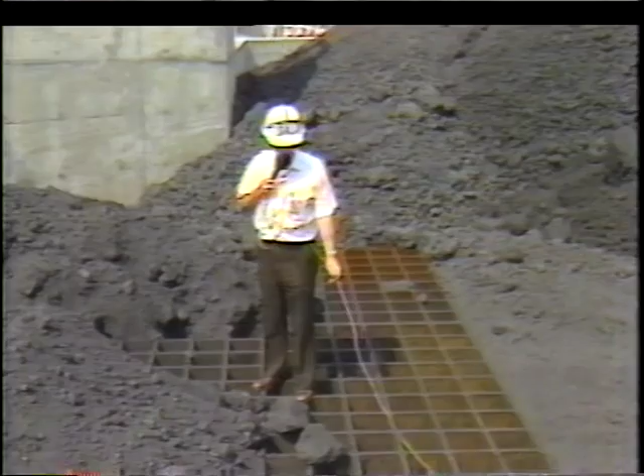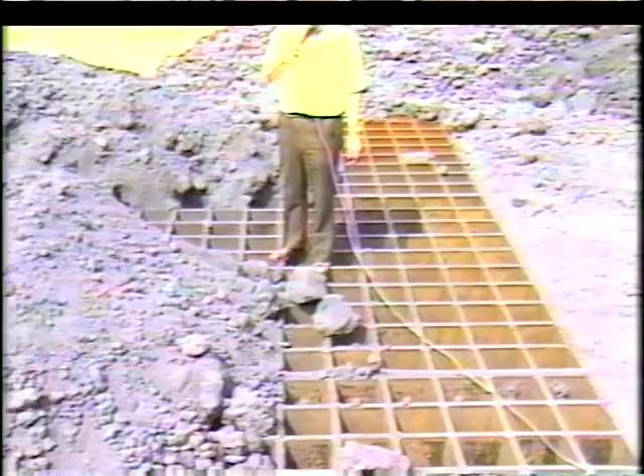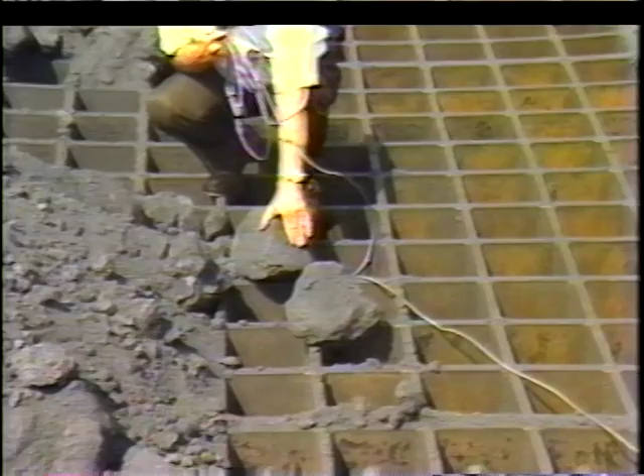We're taking a look at the beginning of our coke handling project, which is where the coke is fed from the coke yard onto a grizzly system which covers our reclaim feeder. This grizzly that we're looking at is made out of 1-inch flat bar in an egg crate configuration with 9-inch by 9-inch squares, such that none of the large lumps greater than 9-inch will pass through into the reclaim hopper, so that our feeder located below will not become plugged.

The reclaim hopper and grizzly operation will hold approximately 8 hours of inventory when heaped full. The front end loader, which has an 8-yard bucket, which represents about 5.3 tons per bucket full, dumps material onto this hopper and keeps it completely covered. The material is being fed from the coke yard grizzly.

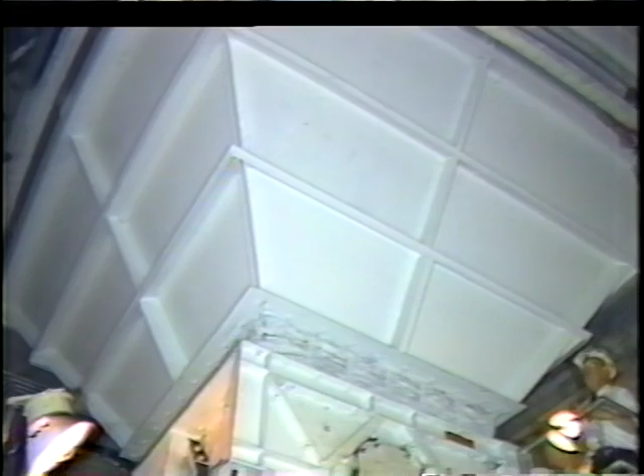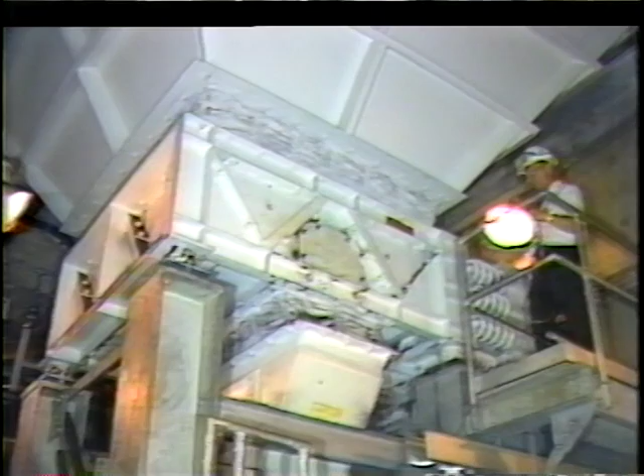It drops down into the reclaim feeder, which is what we see the excitation of by all of these springs. The reclaim feeder has an amplitude of about 5/16 to 3/8 of an inch stroke. It continues to vibrate, carrying all of the material then into the feed skirt of the coke to crusher conveyor.

This coke to crusher conveyor normally travels at around 220 feet per minute. It will deliver 108 tons per hour as currently designed. It has the capability, by speeding up the conveyor, to produce double that capacity to around 220 tons. The reclaim feeder also will handle this increased rate by increasing its amplitude proportionately.

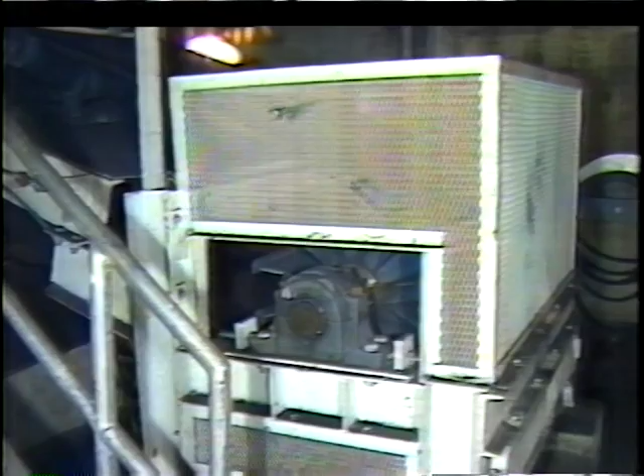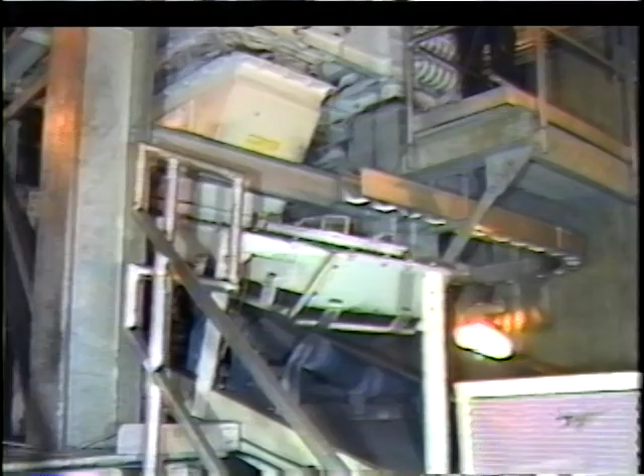Looking at the tail end of the conveyor, showing the tail pulley appropriately guarded to prevent any accidents by personnel. On the far side, which we can't see, is a zero speed switch, which tells us that the conveyor is running, or in the case of the conveyor being activated in the demand stage to run, but yet there's a broken belt or something else stopping it, the zero speed switch will detect that and sound an alarm.

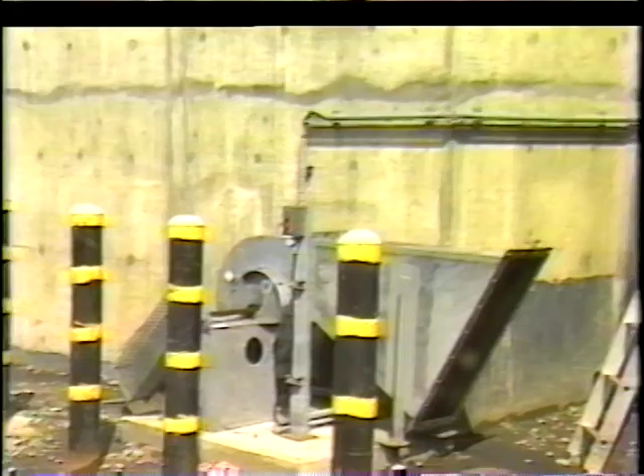Okay, what we're looking at here is the outside of the reclaim pit structure. We see in the foreground our ventilation blower, and in the background our emergency escape and/or maintenance tunnel. This maintenance tunnel is used to remove all of the machinery from the reclaim pit on an as-needed basis. We also have a ladder system whereby we can use this as an alternate means of escape if need be.

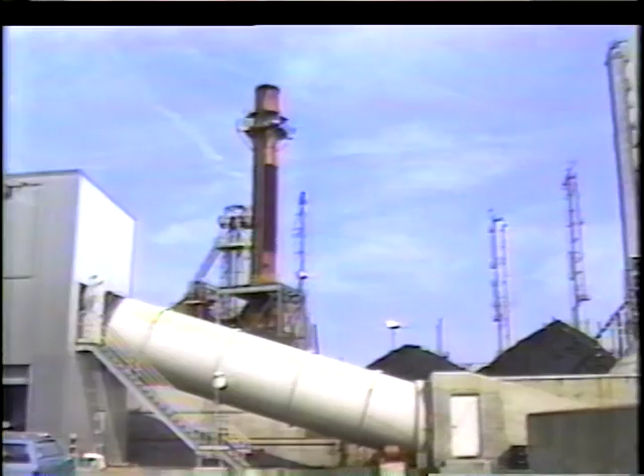Okay, we're panning on the coke to crusher conveyor system as we exit the end of the reclaim tunnel and enter into the first section of the tubular conveyor gallery. We progress up into the magnet tower, where our magnetic separator separates any large magnetic particles from the burden of coke on the belt.

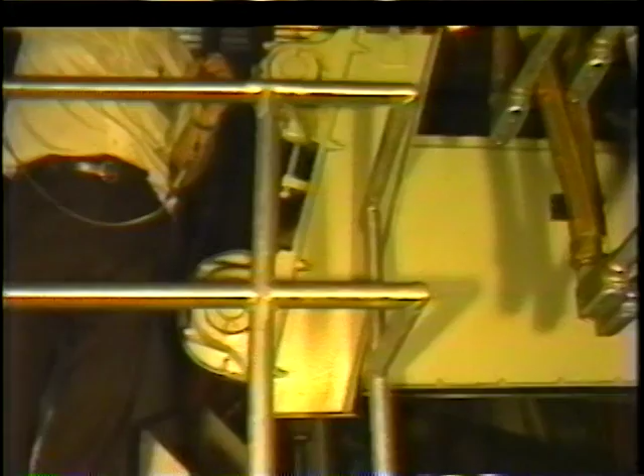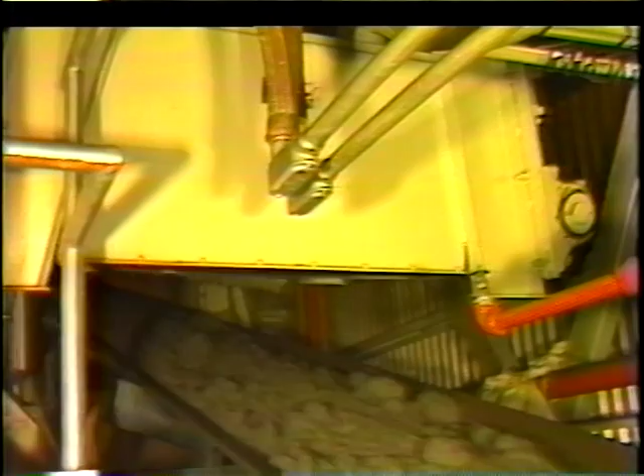This device is an electromagnet which will pick up any tramp metal that happens to be embedded in the load of coke. The electromagnet travels at around 350 feet per minute, so that any piece that it does pick up will move off of the area very quickly without getting wiped off of the belt by the surcharge of material on our conveyor.

The belt on the magnet is an endless belt. It's cleated, and will move the material off at a very rapid rate. It discharges the material after it breaks the magnetic field. It will then fall into our tramp metal chute, dropping down into a hopper located below. The belt continues up into the tubular gallery that runs to the crusher tower.

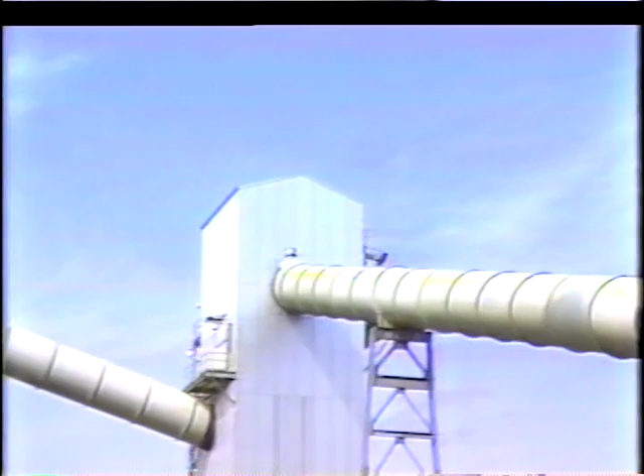The crusher tower contains a pre-crusher where the material that has been fed through the grizzly, which has a 9-inch top size, is then reduced to 3/4 by 0 size.

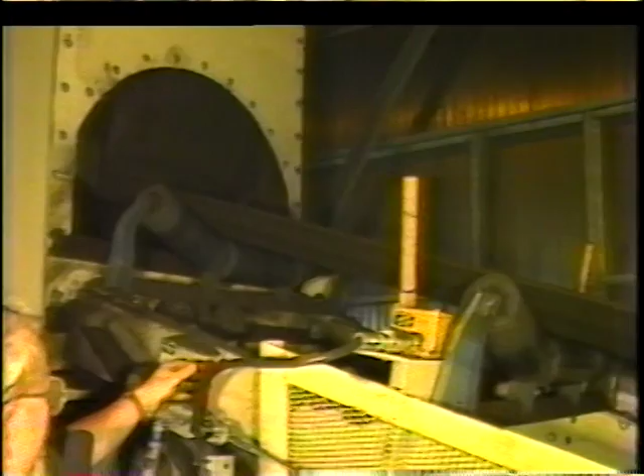Trying to focus on the emergency shutdown switches. There are a series of these located along all of our conveyors. They're all hooked up to an emergency pull cord that runs the complete length of the conveyor. So in the event that there's any problem with anyone getting caught in it, material spilling off of it or whatsoever, all we have to do is pull the cord, which disengages the switch. The red flag will then move into the horizontal position as the indicator that that is the switch that has been tripped.

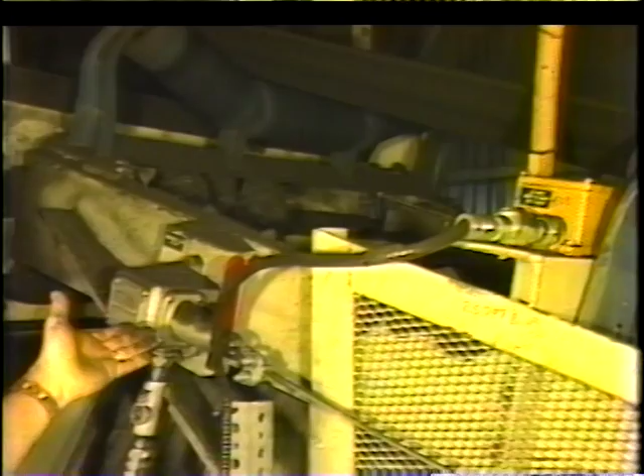Another safety device that we have on our conveyors are the belt runout switches. If our belt, for some reason or other, fails to track properly and moves from one side to the other, we have these runout switches at both the tail end and the head end of the conveyors, so that when the belt touches them, it'll trip the switch and stop the belt in that position.

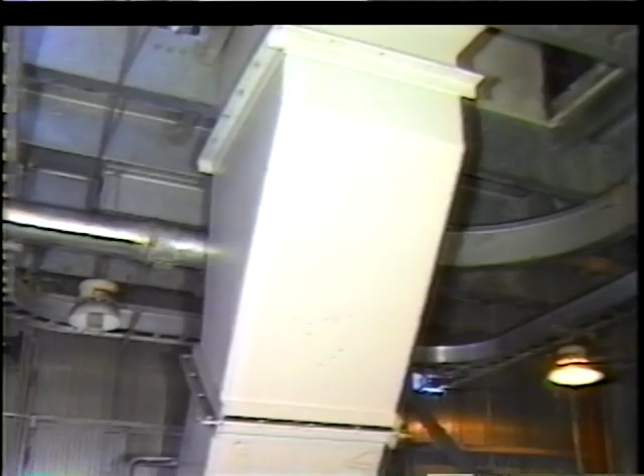What we hear here is coke going through the crusher unit. It sets up quite a racket when it's being heavily fed.

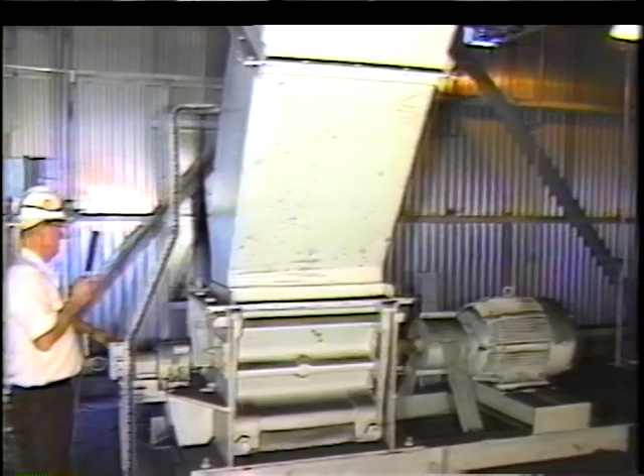We're actually feeding the mill in spurts at the moment, probably at the rate of around 150 tons per hour, which is a little bit over design, but since we're feeding intermittently, the mill can handle it.

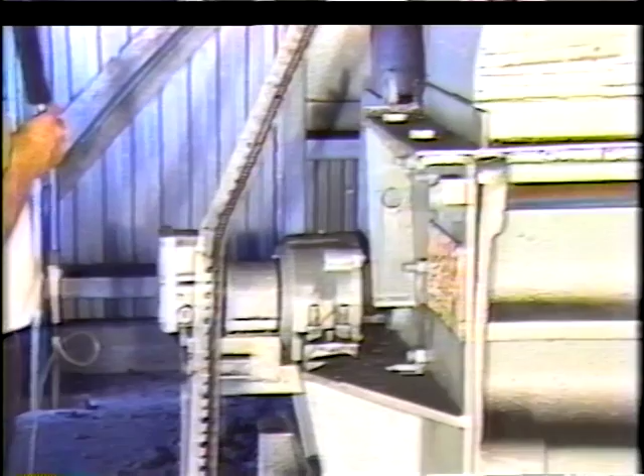We're looking at the zero speed switch on the mill, which is one of the protective devices. Anytime the motor is running and the shaft is not, it will shut the mill down.

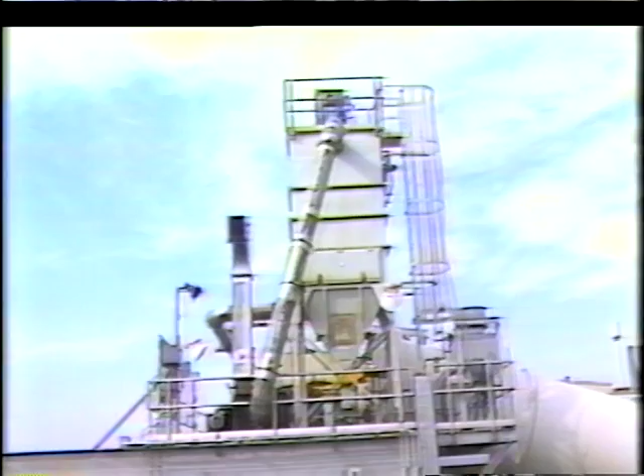We're panning again on the continuation of the coke to boiler conveyor. We see the tubular gallery extending up to the head house of that conveyor, which consists of the drive. In the foreground, we see the dust collector bag house that picks up all of the dust that's being generated in our coke transfer, cleansing it and discharging it back into our number 1 and number 2 coke conveyors, which are drag chain conveyors.

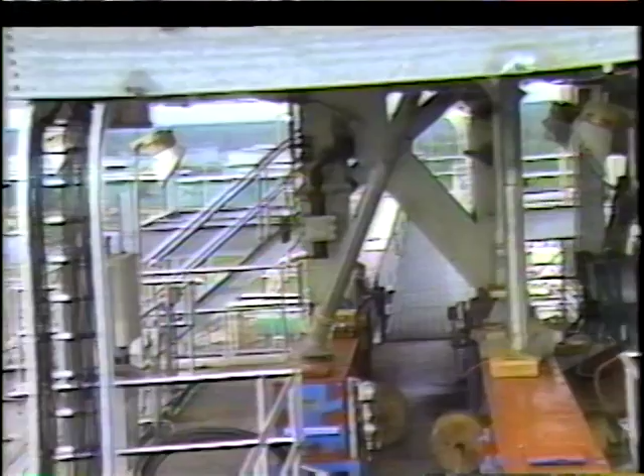Underneath the structure, we see some chute arrangements so that we can divert the coke coming up the coke to boiler conveyor either into the number 1 coke conveyor, which feeds boiler 10, or the number 2 coke conveyor, which is feeding boilers 8 and 9.

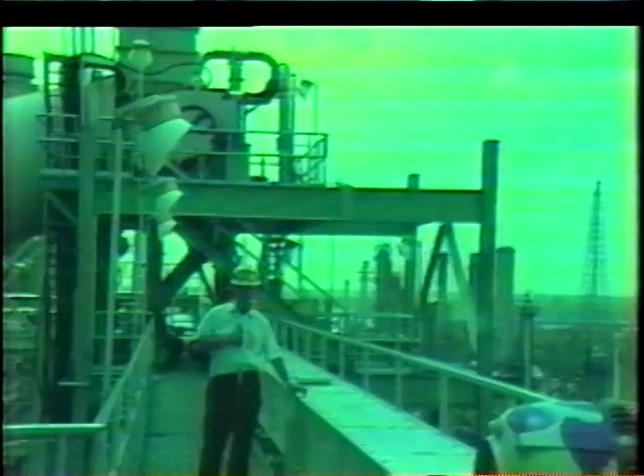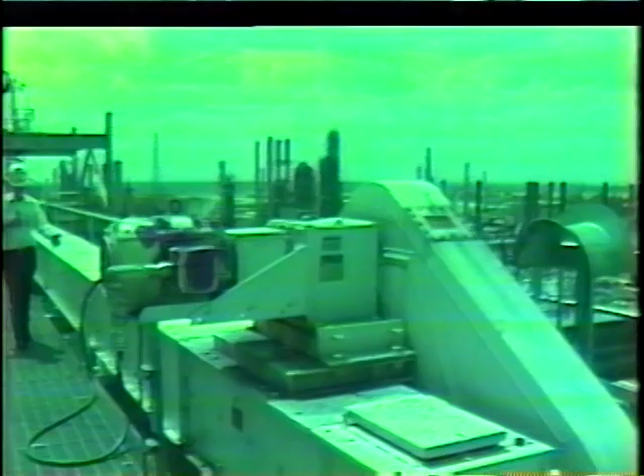I'm standing alongside of drag chain conveyor number 1 at the moment. This feeds the coke then into a chute that drops the pre-crushed coke down into our silos. The conveyor is controlled by a hand-off automatic switch driven through a 15 horsepower motor and gear reducer, driving this drag chain conveyor at a very nice, even and slow speed. You can see the rotation of the end sprocket turning at the moment.

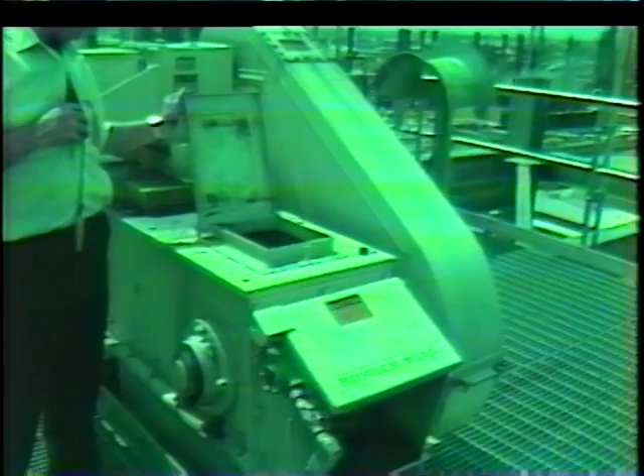We have inspection doors throughout these conveyors so that we can inspect what's going on. The conveyors are totally enclosed, so from an environmental point of view, they're ideally suited for this application in handling the fine coke.

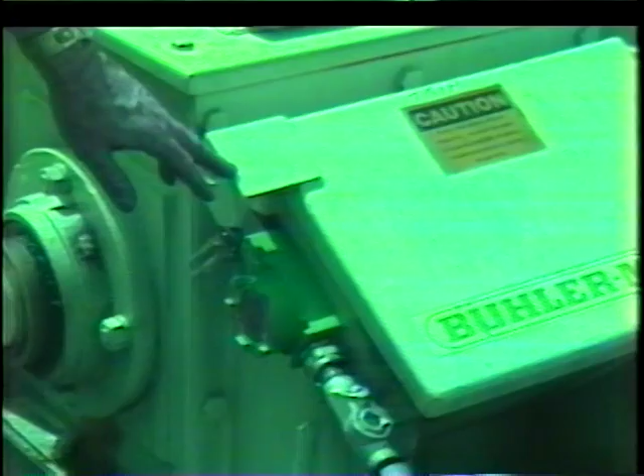The conveyors are basically positive displacement machines, such that if the chute were to plug up with coke, there would be no place for the material to go that is being dragged down here, and it would either overload the machine and trip it out, or most probably would lift up this door at the end of the conveyor, which is basically nothing more than a safety valve, so that when this door trips up, the micro switch that senses the door movement would trip the conveyor off, and that would act as our safety device.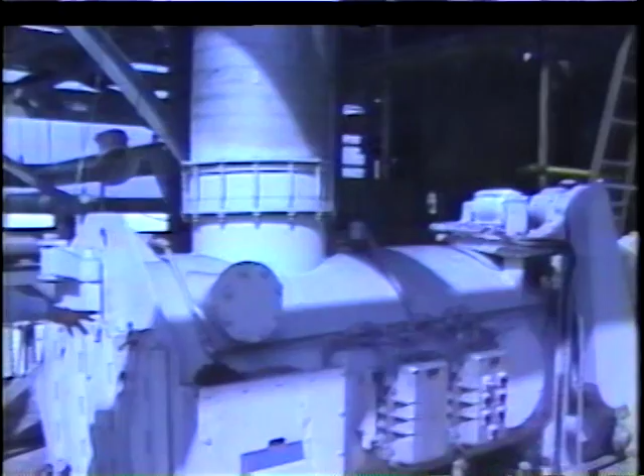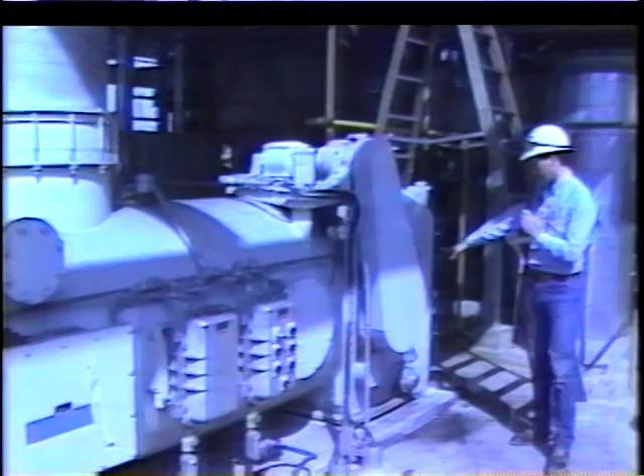Once on the belt, it is weighed. The coke drops off the end of the belt, where it free falls down into the pulverizer. There is another indicator here, which indicates when this pipe is clogged.

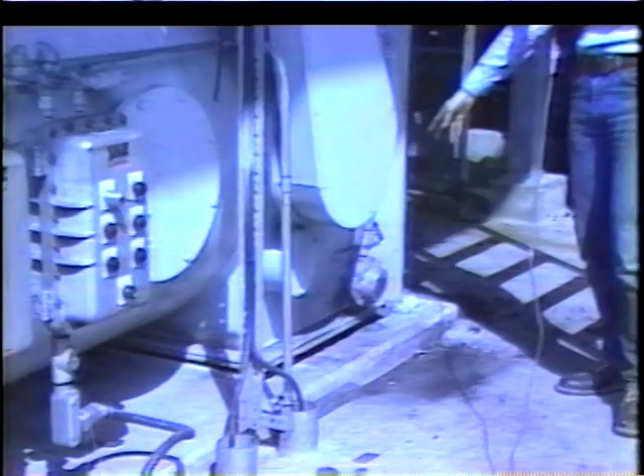Okay, this is the line where the material enters the pulverizer. It comes directly from beneath the weigh belt feeder, drops down through the stainless steel pipe, and goes directly into the bottom of the grinding chamber.

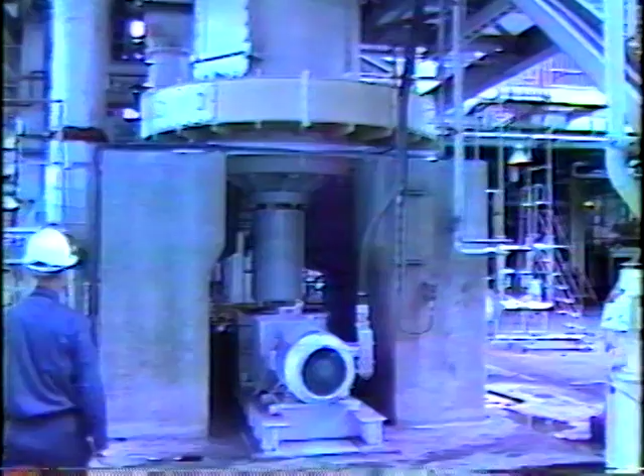At this time, we'll take a listen at the mill so we can hear it in operation. Sound of the gear reducer. And the sound of the 300 horsepower Siemens Allis motor. The mill is now at 21,500 pounds per hour, full out capacity.

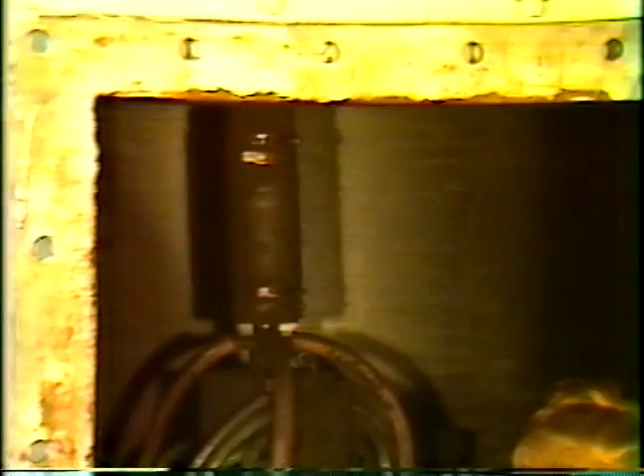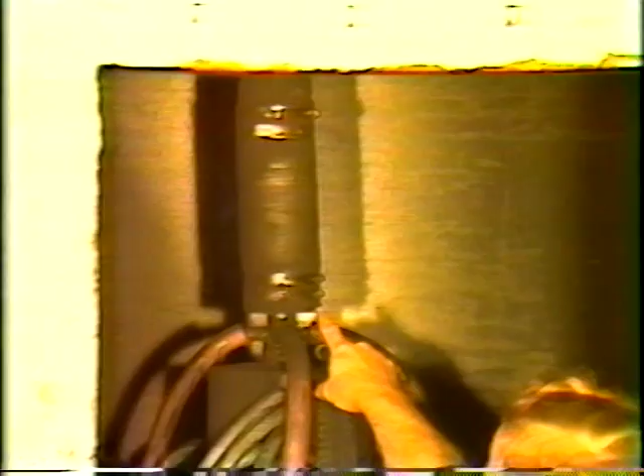Okay, this is the inside of our DF roller mill. We have an air seal, air supply coming in that supplies air to our rotary air seal. This air seal distributes air through this red flexible hose out to each journal. The purpose of this air seal is to keep an airlock on the journals to keep the dirt out.

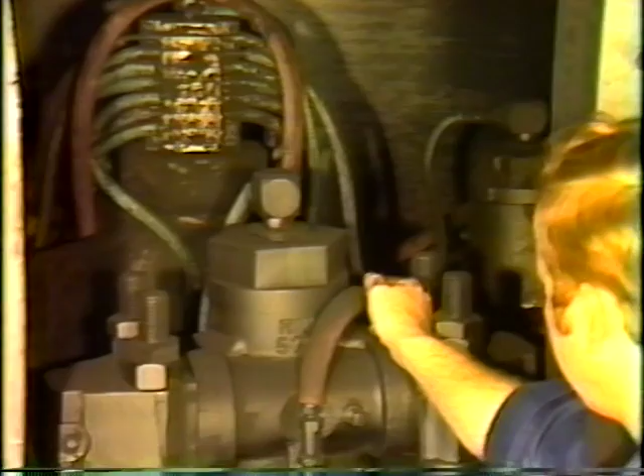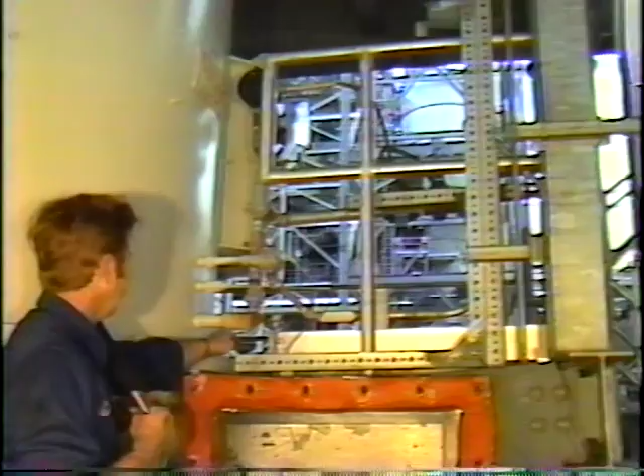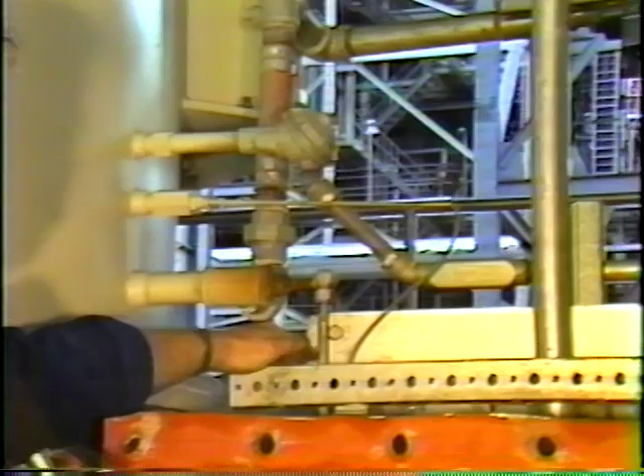Okay, the air seal, this is where the air seal line comes down into the journal. What it does, it provides air pressure into this area right here, which keeps dirt and material away from the seal. Okay, here we have the location where the air supply enters the air seal, and here we have the lubrication line which supplies lubrication to the inside of the pulverizer.

Up here we have a thermocouple which measures temperature of the inside of the mill, and here's a secondary temperature probe that Shell Oil has provided for their controls.

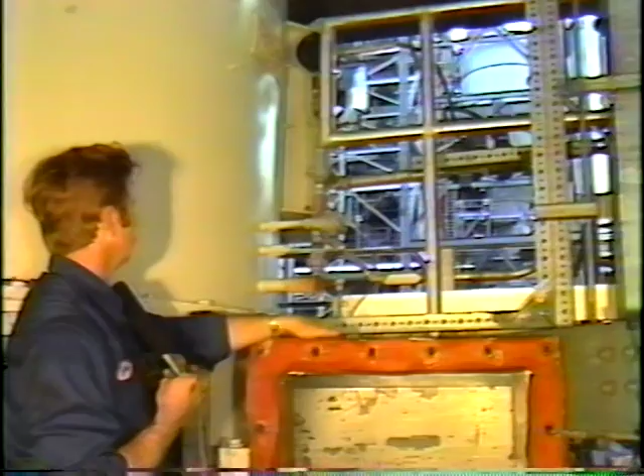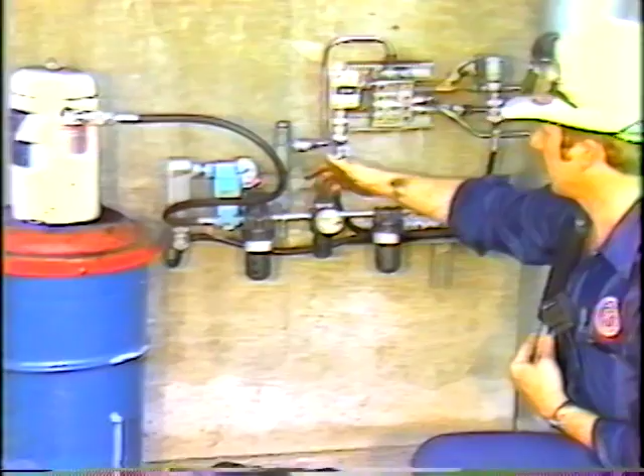Okay, here we have our automatic lubrication system. This is a pneumatically operated pump. We get our air supply from the plant through a filter, pressure regulator, and a lubricator. This pressure regulator, pressure inside of it is regulated between 40 and 60 pounds pressure. When the system is activated from inside, it opens up the solenoid valve, which allows air into the pump.

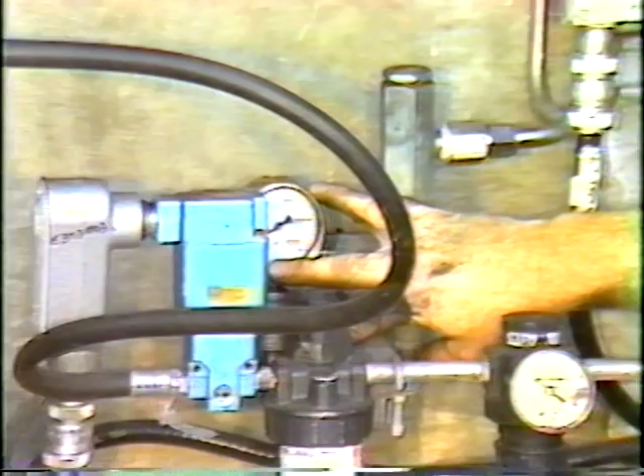Once the pump cycles, the grease then exits through this flexible steel hose. As the grease travels down the line, we go through a regulator pressure gauge. This pressure gauge shows us the pounds of pressure on each cycle. In other words, each time the pump is activated, this needle will rise to that amount of pressure.

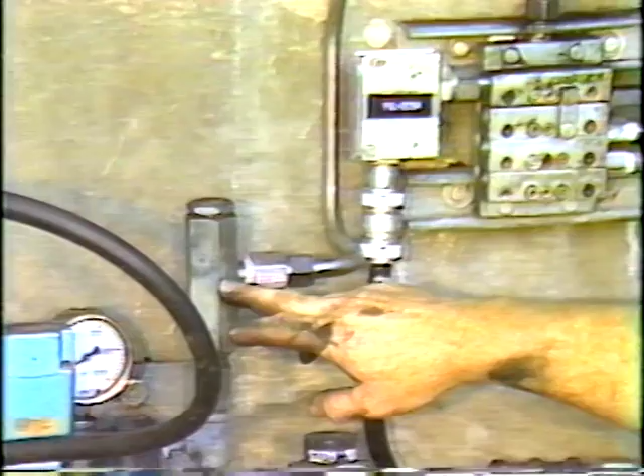As the light grease continues, it goes on through a strainer which strains out any impurities that might be in the line. It comes on around and goes into the primary distribution block. Now this distribution block is made up of several piston-operated sections. Each time this grease goes through here, each one of these pistons and each of these secondary blocks has to make a full cycle back and forth

to complete one cycle. Well, right here we have a micro switch that has a plunger on it. Each time the grease goes through it, it must go all the way through the whole system, each one of these pistons functioning, before we'll activate a plunger in this micro switch. And this micro switch is set up for approximately 5 cycles every time the lubrication is called for from the computer. If one of these pistons does not make a full cycle, this micro switch will immediately let them know inside. It'll give them a lube fault signal.

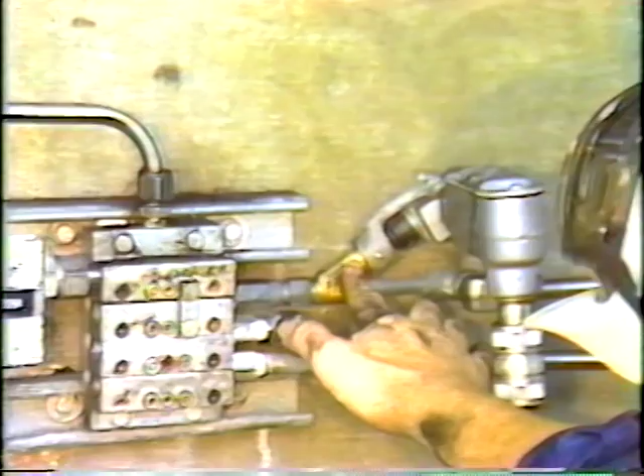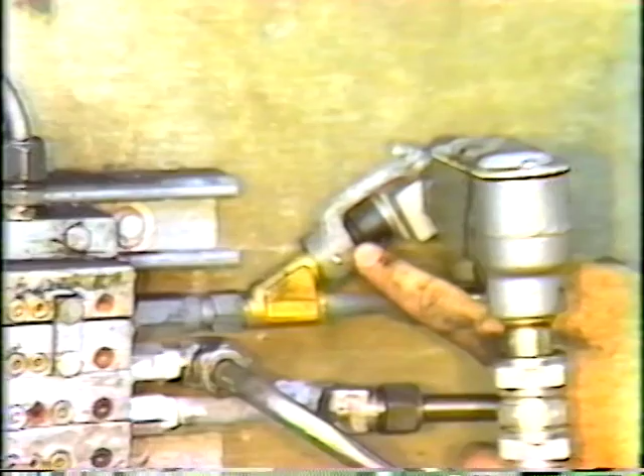On the other side here, where the grease discharges this primary distribution block, we have another micro switch. What this switch does, it has a plunger that operates back and forth. This plunger is spring-loaded, and it takes a certain amount of pressure to push this plunger up. Now when the lubrication system has cycled, pressure will come through here, put tension on the spring, and it will work the plunger up, which will push this micro switch in and maintain contact on the switch. This contact has to be maintained for several seconds, otherwise we will get a broken line indicator inside on the computer display.

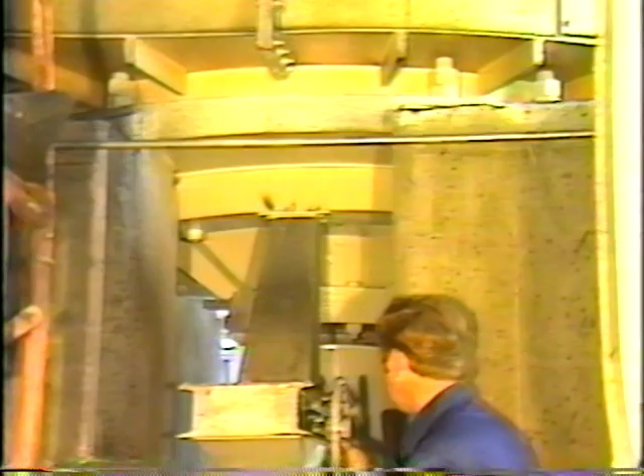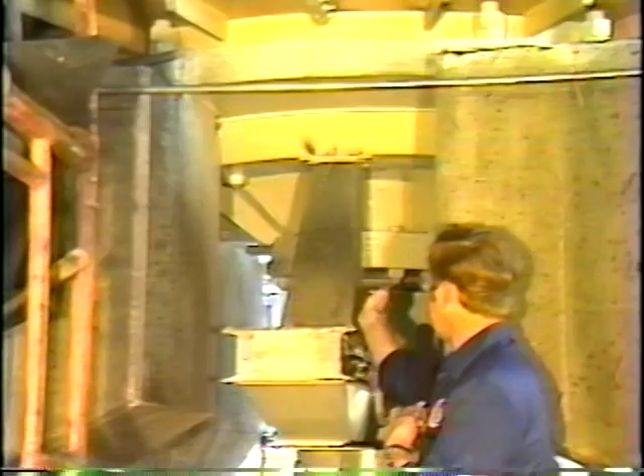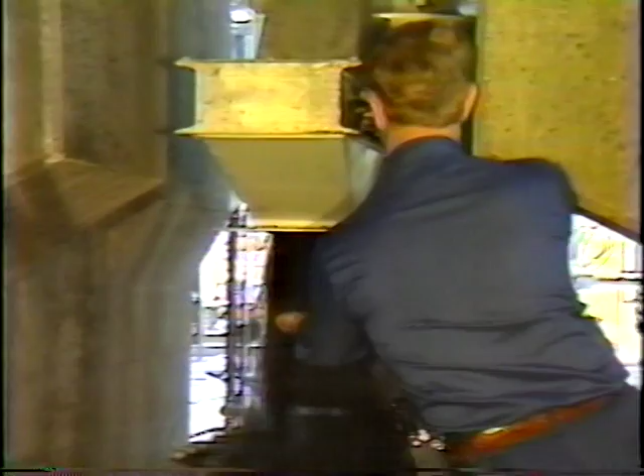Okay, this is our discharge chute. What this chute is for, it leads into the bottom of the grinding chamber, and any pyrites or any hard to grind obstacles that get inside the pulverizer can fall down through this chute and exit out the bottom of it. So periodically, this chute is opened, as I will now do, to discharge these pyrites. Normally, as you can see some of the material coming out... this is just a sample of material coming out.

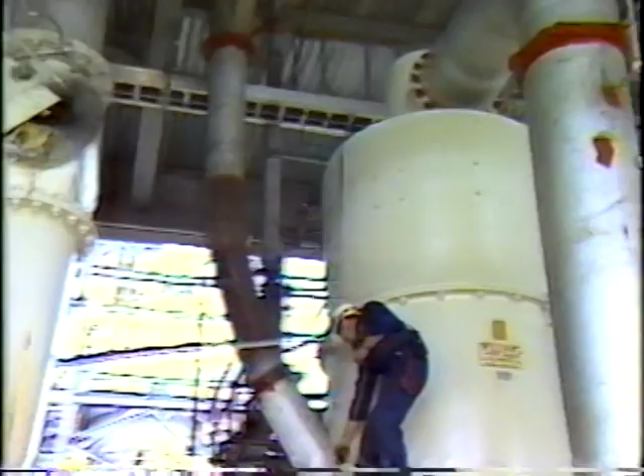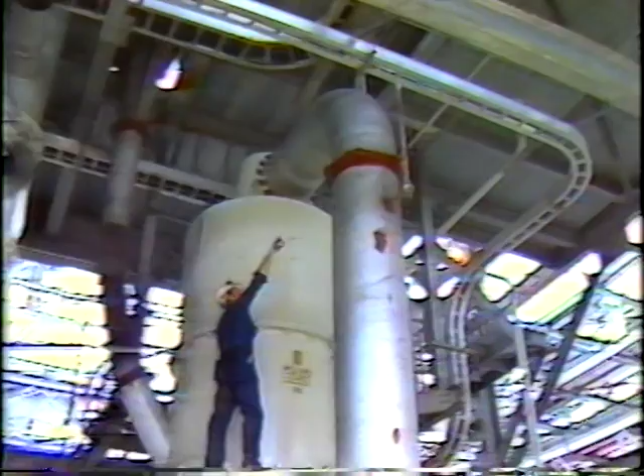Now as the feed is ground up, the feed is lifted up by air into our classifier. The fine material passes on through, and the coarser products are knocked back down for regrinding. Once the material is fine enough, it leaves the classifier through that large 24-inch pipe that we'll call our product line. It comes on around the 90, down as you follow the line, on in to the exhauster. The exhauster conveys the material on up through the pneumatically controlled coke valves and on up into the diverter valves.

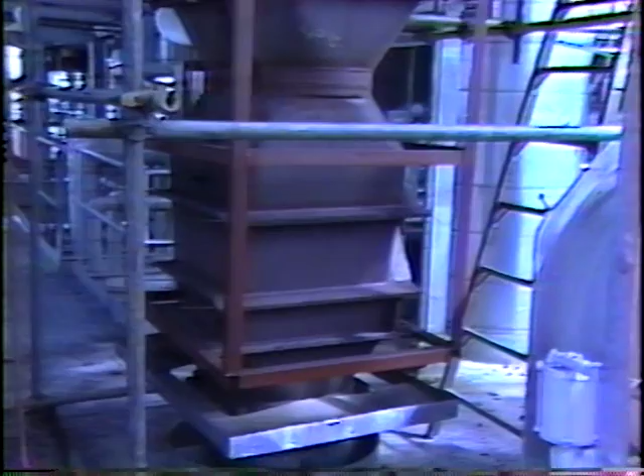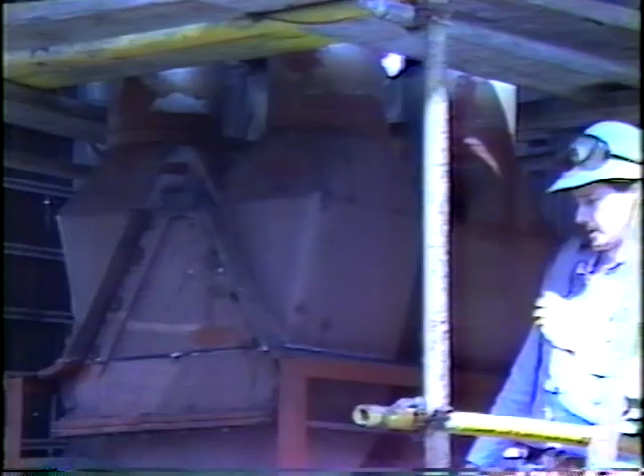The coke and air stream is split into two by this splitter. It's split into two streams, one on the right and one on the left. Each of these streams is again split into two, giving a total of 4 separate coke and air streams.

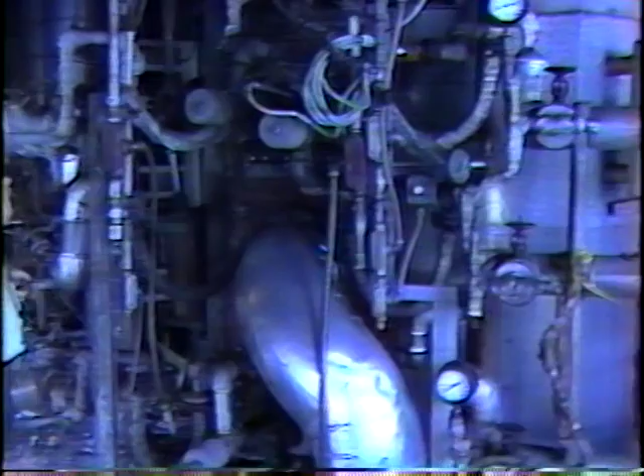This is the burner elevation. We have 2 main burner levels. Upper main gun, and the lower main gun is located at the bottom. In the center we have our pilot and our natural gas elevation. Natural gas comes in from the side. This is the elevation where the coke is blowing in.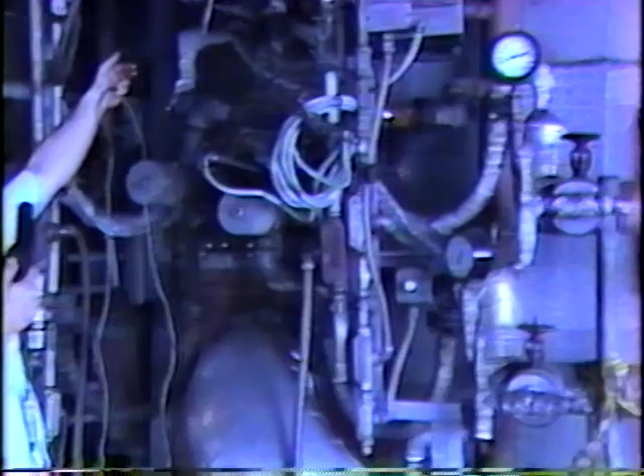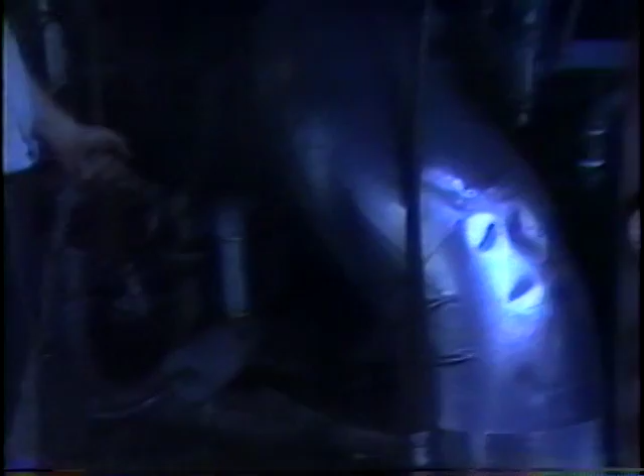On the upper elevation, we can either fire pitch or fuel oil. The same on the lower elevation. This is the lower pitch gun or fuel oil gun. It's a main gun elevation.

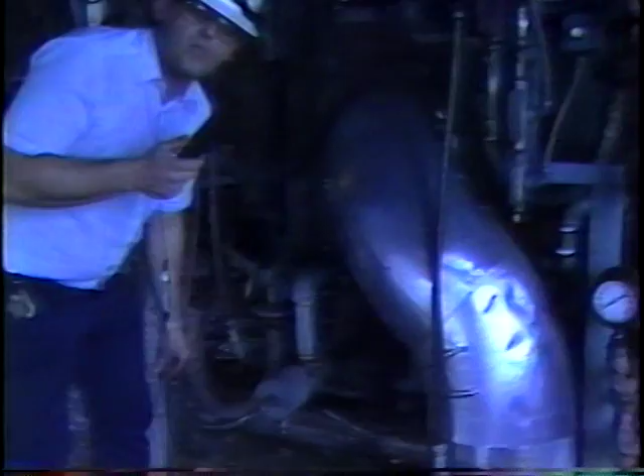How many fuels do you have? Well, right now we have 4 fuels. We can burn pitch or fuel oil in the 2 main guns. In this elevation, we burn fuel oil as a pilot or natural gas.

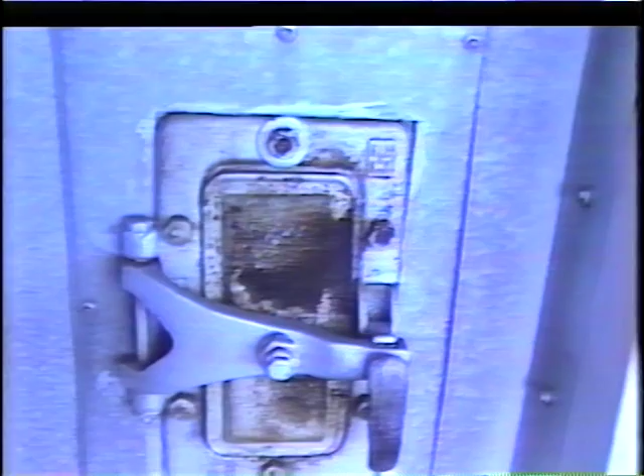This is the purpose of this movie now. We will place a blue filter across the lens, which will enable us to look directly into the furnace. Please open the door. What you are now looking at is a coke flame as depicted by the black sections that are interspersed between the pitch that is being burned on both top and bottom.

This coke is being introduced at a rate of 22,000 pounds per hour by means of 4 burners located tangentially around this Combustion Engineering tangentially fired boiler. The coke has been ground to a fineness of 90% minus 200 mesh. The ash content measured at the baghouse is measured at 99% burnout with only 1% carbon. Please close the door.

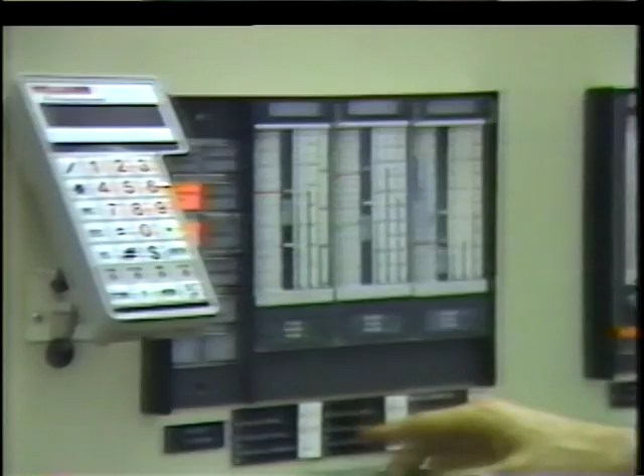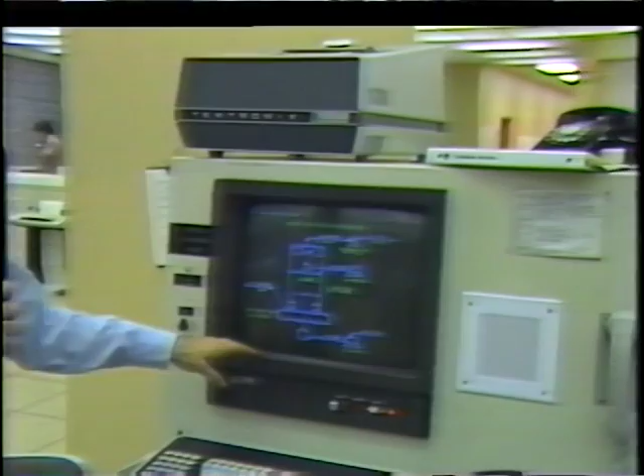These bar graphs show the most important of the mill parameters, including the airflow in the mill, temperature, mill speed and amps, spinner speed, differential pressure, and the coke air fuel ratio. A diagram showing the present status of the mill. It shows the most important of the mill parameters, and it also graphically shows the mill and the various motors.

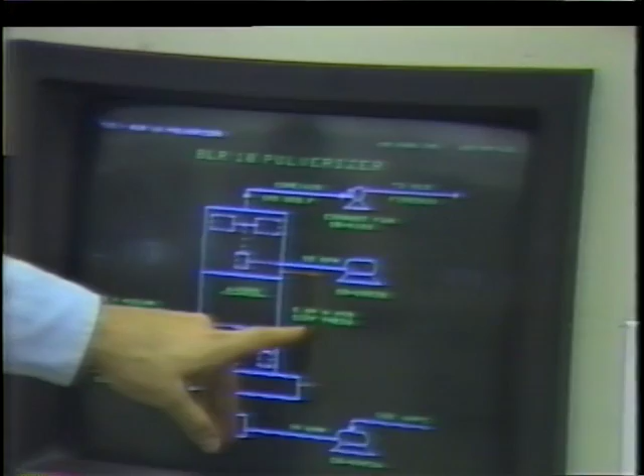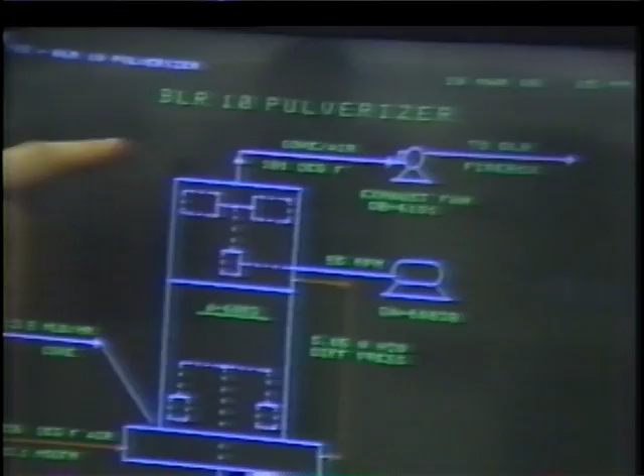For instance, this is the mill motor. It's running at 74 RPM. Delta pressure here is about 6 inches. This also shows the spinner motor, which is at 55 RPM presently, and the exhaust fan. Outlet temperature here is 200 degrees Fahrenheit. The inlet is 325 degrees.

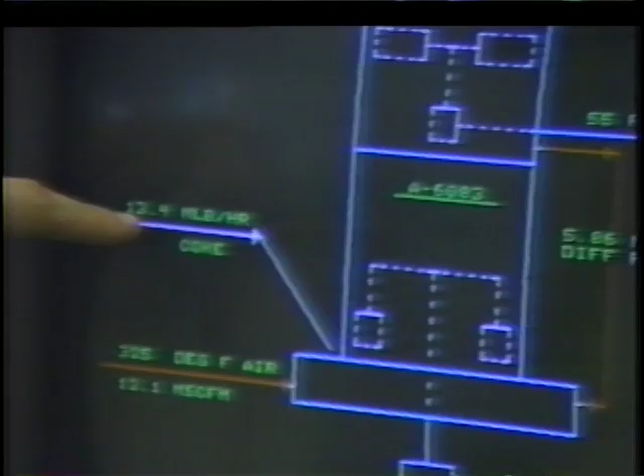We are feeding coke at a rate of 12,400 pounds per hour at this time. And how many amps? We're drawing a little over 200 amps on the mill motor.

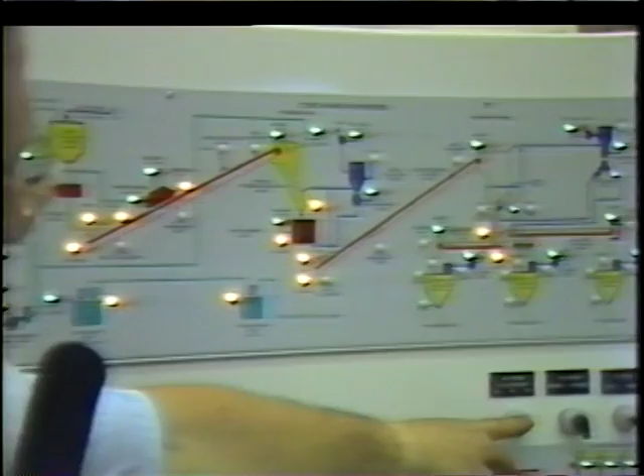This is the graphics panel which we use to monitor the transfer of coke from the grizzly into the silos in front of each boiler. All you do is select what silo you want to transfer it to in front of which boiler, hit the start system, and the PLC automatically starts it up and fills that silo. When the level gets high, it automatically runs out the system and empties the belts.

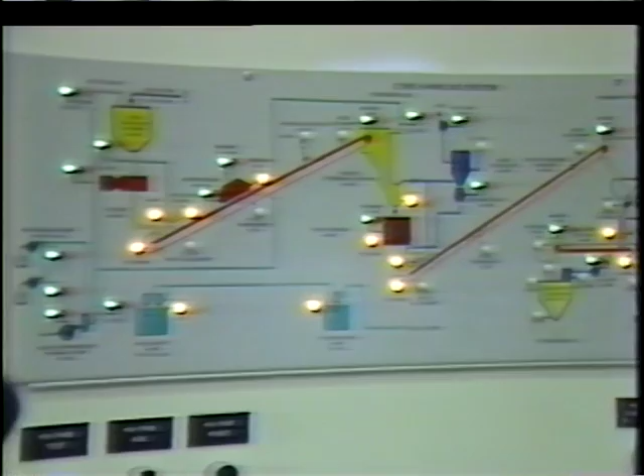All of the lights on the panel indicate the operation of the system. The red lights tell you whether something is running, and the green lights tell you when it stops. The white lights are alarm lights, which alarm when there's trouble, and that indicates what shuts you down or why.

Boiler 10 baghouse. This baghouse takes all of the flue gas that is produced by boiler number 10, passes it through the baghouse, where all of the solid particles are separated from the gases before they go up the boiler stack. The baghouse has 8 modules. Each module contains about 440 bags.

The boiler can operate, depending upon load, with as few as 6 modules in service, one being out of service for cleaning, the other being out of service for some maintenance. We also have the capability of bypassing the baghouse entirely so that we can operate with the baghouse out of service, where the flue gases then will be diverted directly through the ID fan and out the stack. There is a bypass valve in that ducting as well.